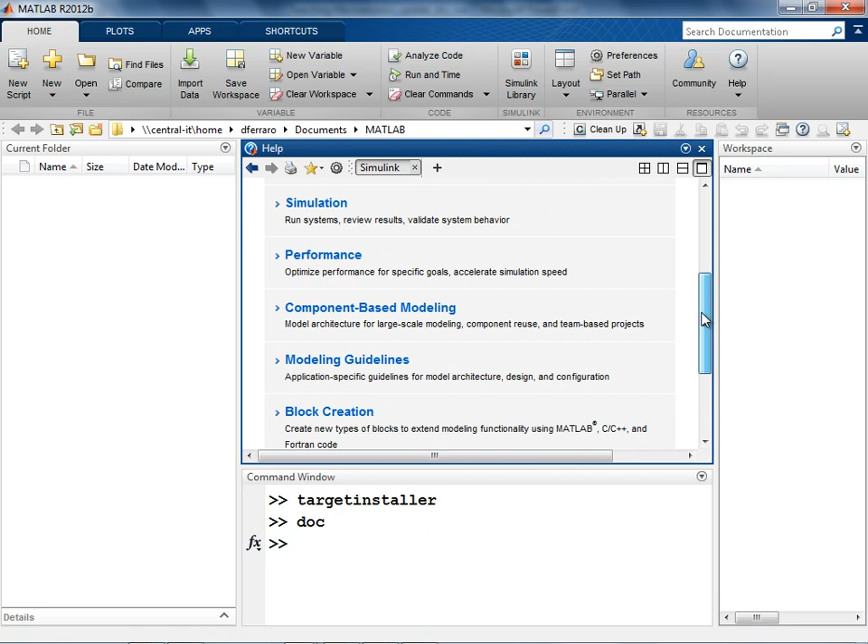This interface will install the required libraries as well as additional help, a set of demos and tutorials, and all the drivers and compilers you need to work with the hardware from Simulink. For example, you will get some additional documentation inside the Simulink documentation, target hardware. You also get access to a set of specific demos for the hardware: demos for Arduino, LEGO Mindstorms NXT, and BeagleBoard.

We will start now from a specific LEGO Mindstorms NXT demo called Roving Explorer. This is an example of a Simulink model developed to control the TriBot LEGO Mindstorms NXT robot. We are now seeing the model with the new Simulink Editor, available from release R2012b. Please remember that the features we are going to see today are available from release R2012a and included also in MATLAB and Simulink Student Version.

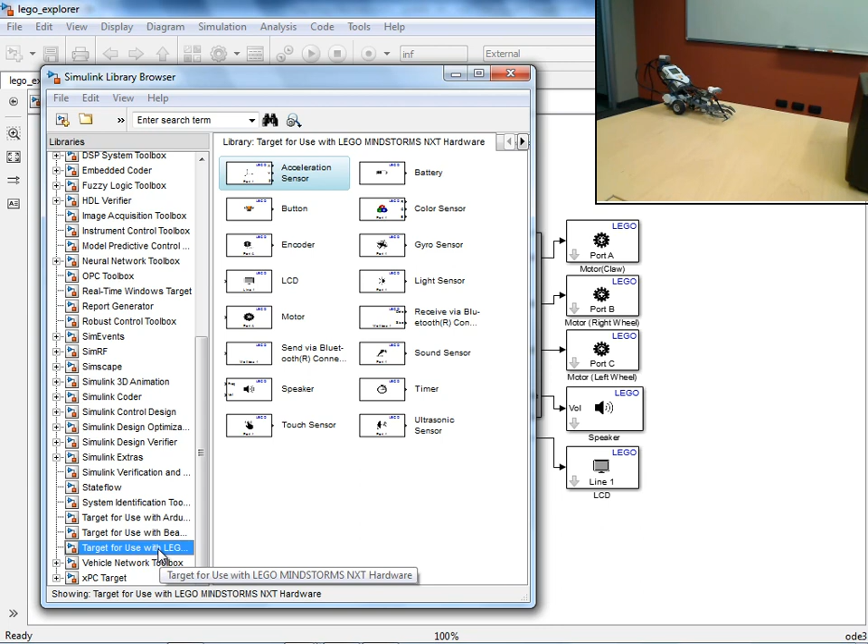In this model, we can read sensor inputs through a series of blocks that are included in the library Target for use with LEGO Mindstorms NXT that we have installed with the command targetinstaller. These blocks are reading the input from encoders, touch sensor, sound sensor, light sensor, and ultrasonic sensor. This information is then processed through a block diagram in Simulink inside this controller block. The output from the controller is then sent back to the robot using some actuator blocks like motors, speaker, and LCD.

As soon as the model is ready, I want to run it on the target hardware, our LEGO Mindstorms NXT robot. I can connect the robot to my PC using the USB cable. We may then run this model with two different configurations, an automatic and a manual approach. Let's start with the automatic approach. We execute the robot in an embedded configuration, removing all the communication with Simulink. All we need to do is go in Tools, Run on Target Hardware, and then click Run. After clicking on the Run button, the deployment process starts.

As soon as the download is completed, we can remove the USB cable and the robot is now programmed with a basic control algorithm for obstacle avoidance. As you can now see, the robot is now running independently from the PC.

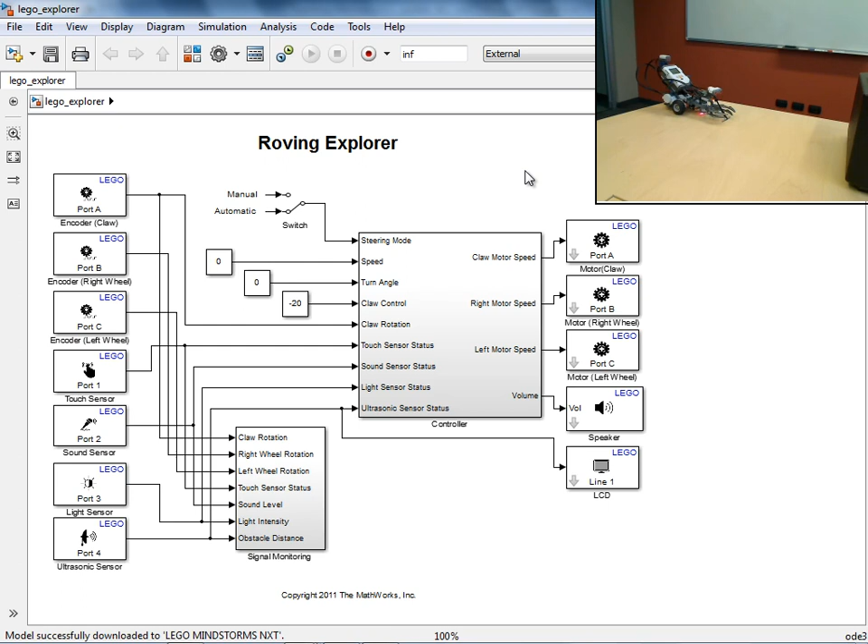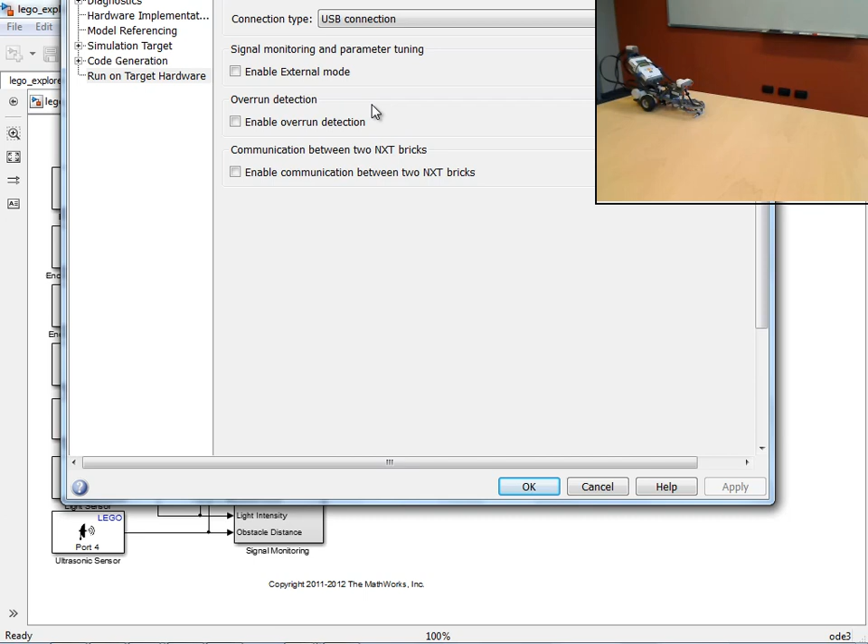A second option is to use external mode, allowing a Bluetooth communication between the PC and the robot. This mode allows the robot to exchange information with the PC during simulation. To enable external mode, we can set the switch to manual, we can check that the simulation mode is set to external, and then we can go to Tools, Run on Target Hardware, Options. In the options, we can flag Enable External Mode and press OK.

At this point, we can just, as we did before, click on Tools, Run on Target Hardware, and then Run to start the deployment process of the model on the robot. As soon as this process is completed, we can remove the cable. The communication is now offered by the Bluetooth connection. We are now ready to exchange some parameters in the model and see what happens on the robot.

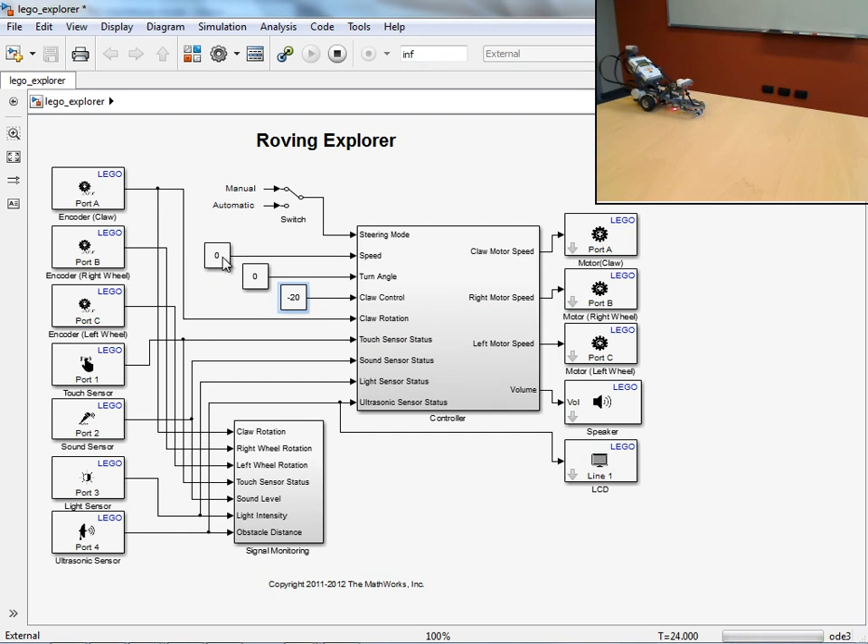For example, I can open and close the robot claw. So let's change a parameter in the constant block, and the claw opens, and then closes. Or I can change the speed and move the robot forward and eventually have it turn around.

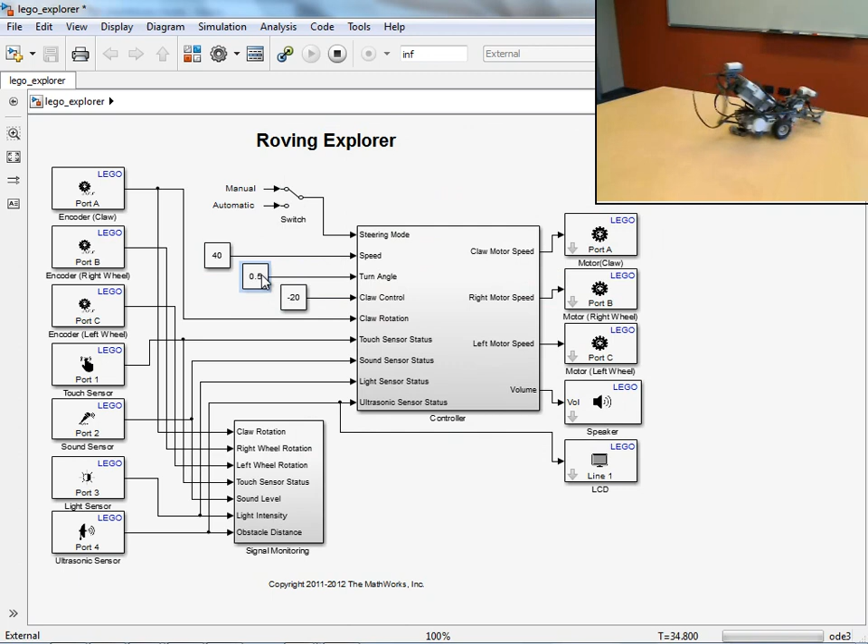Let's now step back on our three low-cost hardware platforms. We will see the typical application of these devices and the opportunities available for applying project-based learning methodology. Arduino can be a perfect choice to test your algorithms with hardware. You are able to develop communication between a PC and the board, or to design your application on the PC and then deploy it on the board for standalone execution. The board is a perfect solution for teaching algorithms, test and measurement, and control applications.

LEGO Mindstorms NXT is a popular choice for developing simple robotic systems. Thanks to the rich set of sensors and actuators, this hardware can be customized for many different applications. The design phase of an industrial robot can be applied in an educational context, offering the opportunity to experience system design and software development using the same techniques available in the industry. The last hardware we will discuss is BeagleBoard. This low-cost open-source Linux PC has multiple input-output connections suitable for signal and video processing applications.

Depending on the specific class you are teaching, you may consider which of these platforms can provide you the best hands-on experience for the students. To provide you guidance on this choice, we will review possible applications with Arduino, LEGO Mindstorms NXT, and BeagleBoard. The first platform we are going to introduce is Arduino.

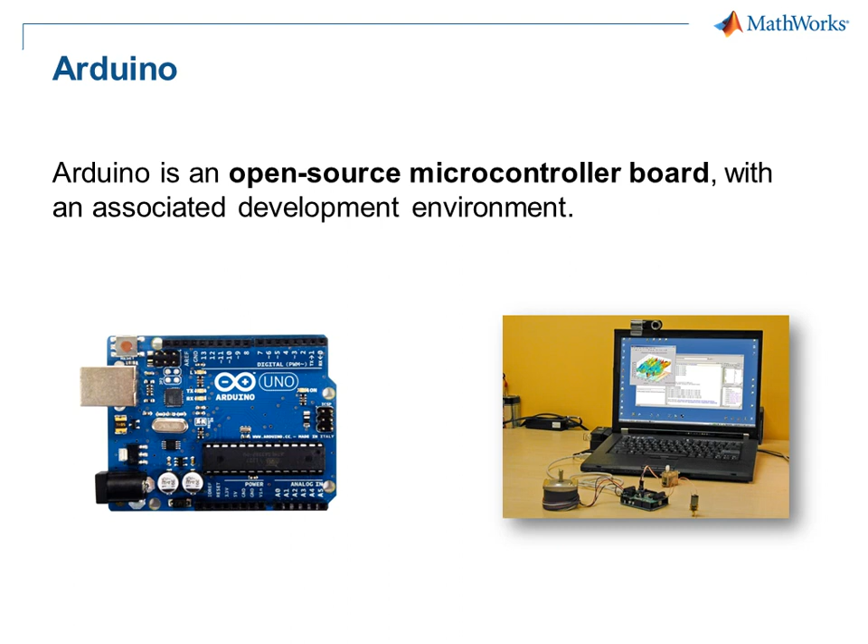If you want to use the board in a project, you need to connect it to sensors and actuators. Depending on the nature of your class, you may have different options. If you would like to have your students practice on electrical networks, you may like to use an external breadboard or a breadboard shield. This approach allows the student to design the electrical system first and then control input and output from MATLAB. If your shield does not require any specific library or instruction, it can be easily interfaced with MATLAB and Simulink. All you need to do is to map the relation between the Arduino pins and the board ones.

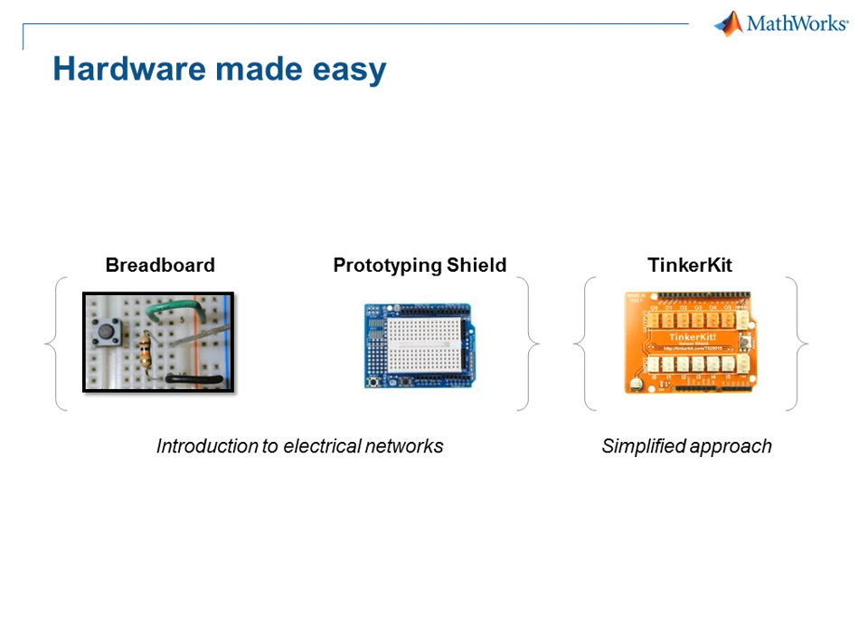If you would like to avoid introducing electrical networks and your focus is on the algorithm design, you may consider using a specific shield such as TinkerKit. The special shield comes with a set of ready-to-use sensors such as potentiometers and buttons, and actuators such as LEDs and mini servos that can be directly connected to custom pins. You do not need to build an electrical network. You can directly connect your components and start developing your MATLAB control algorithm.

Arduino is a very versatile platform. If you're looking for opportunities to test your algorithms on a real board or design mechatronics systems, you may surely find in Arduino an optimal solution. MATLAB enables the student to experience the interaction with the board from a basic input-output approach to the actual system design for an embedded processor. Due to the large popularity of this board, you may find many different applications on the internet that you may quickly introduce in your class.

Depending on the complexity that you want to introduce in your project, you may consider different approaches. A first interaction with the board can be achieved with the MATLAB support for Arduino package. Arduino is directly connected with your PC and an input-output communication is achieved through a serial connection. With this approach, you can easily acquire information from sensors, process in MATLAB using your own algorithms, and then send your output back to the board to control some actuators.

Thanks to this tethered approach, you may have your students practice on basic algorithms or more advanced applications, for example control, test and measurement, signal processing, everything in connection with real hardware. The next step is to move from the algorithm to the realization of an embedded application to be deployed on the board. We want to program Arduino to execute specific tasks without being connected to a PC. The board becomes an independent system that can be installed into real-world applications such as robots, cars, airplanes control units.

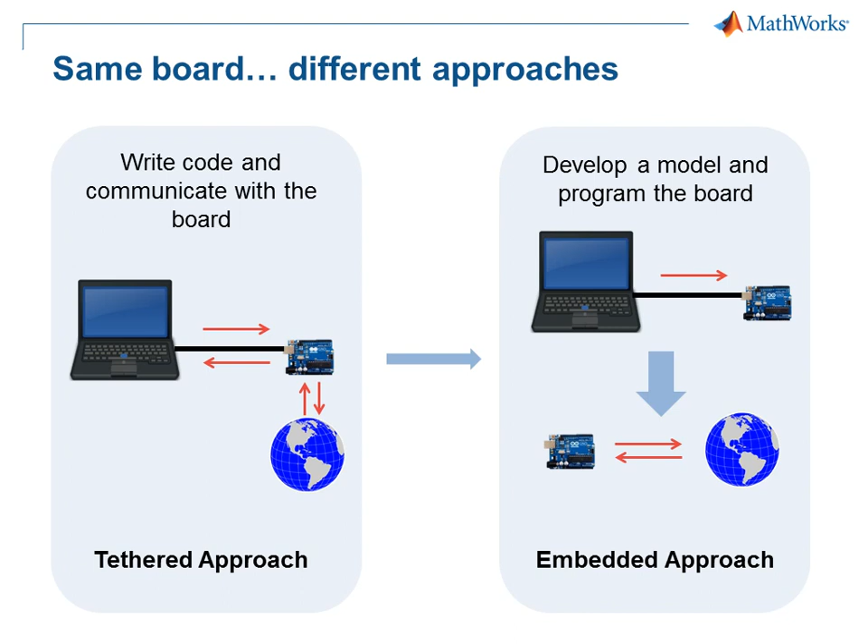This is what we call embedded approach and can be implemented through Simulink support for Arduino. The system can be modeled and simulated in Simulink environment through block diagrams. The model is then converted into an executable to be deployed on the board. We will see how this workflow allows the students to experience an engineering design process focusing only on the design tasks without low-level hardware issues. Let's focus on the tethered approach first.

As we have just introduced, the tethered approach is based on a direct communication between the Arduino and MATLAB. The USB cable connected to the PC allows us to transmit data back and forth with the board using serial communication. Through basic algorithms, you are then able to read and write information with an input-output approach. To start using this functionality in MATLAB, you may download the MATLAB support package for Arduino that is available on the Hardware Support for Project-Based Learning page we have seen before.

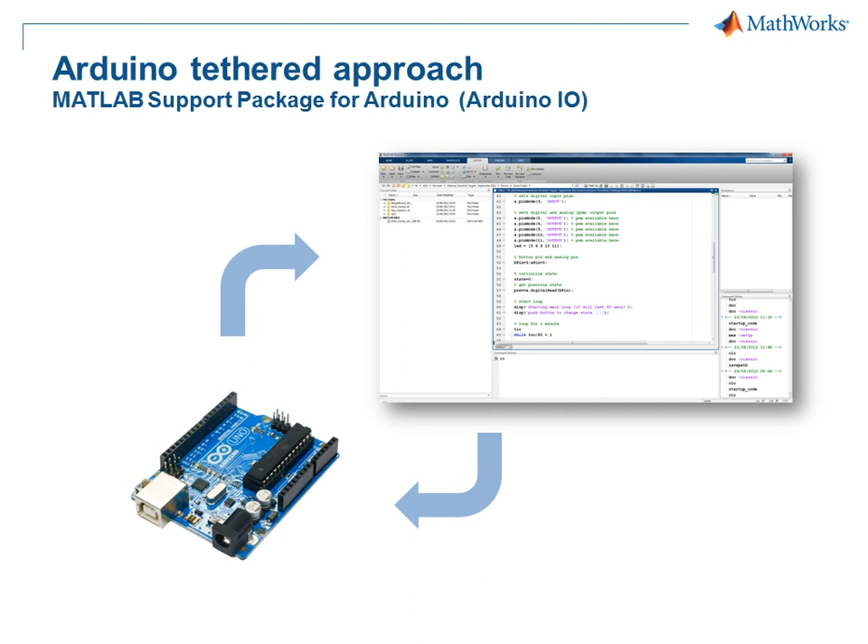This package contains a server application to deploy on the board that will take care of handling the communication with MATLAB and a list of simple commands to be used to control the communication. The abstraction of computer science is then transferred into an interaction with a real platform. Let's now see two simple applications of MATLAB support package for Arduino. This example is called Arduino Blink Challenge and is a simple programming task with Arduino.

First of all, let's have a look at the hardware. We have an Arduino Uno board with on top a TinkerKit shield. The TinkerKit shield offers a series of input ports as well as output ports. Connected to the input port, we have a linear potentiometer. As an additional input connected to an output port, we have a button. The output port can be interpreted as a digital input port. All the other outputs are actually LEDs of different colors.

Our challenge is to control the way that the LEDs blink by using the button and the potentiometer. We consider 4 different modes. In the first mode, all the LEDs should be off. In the second mode, all the LEDs should be on. In the third mode, all the LEDs should blink simultaneously with variable frequency regulated by the potentiometer. In the fourth mode, the LEDs should blink sequentially, like a wave, with variable speed regulated again by the potentiometer. The button should allow us to move from one mode to the other.

Using the tethered approach, we can use a MATLAB script to acquire the input from the button and the potentiometer and control the state of the LEDs. Let's have a look at the code. With the command Arduino, we are able to establish the communication from the PC to the board. In the next section, we are initializing our pins. We are choosing if a pin on the board should be interpreted as an input or an output.

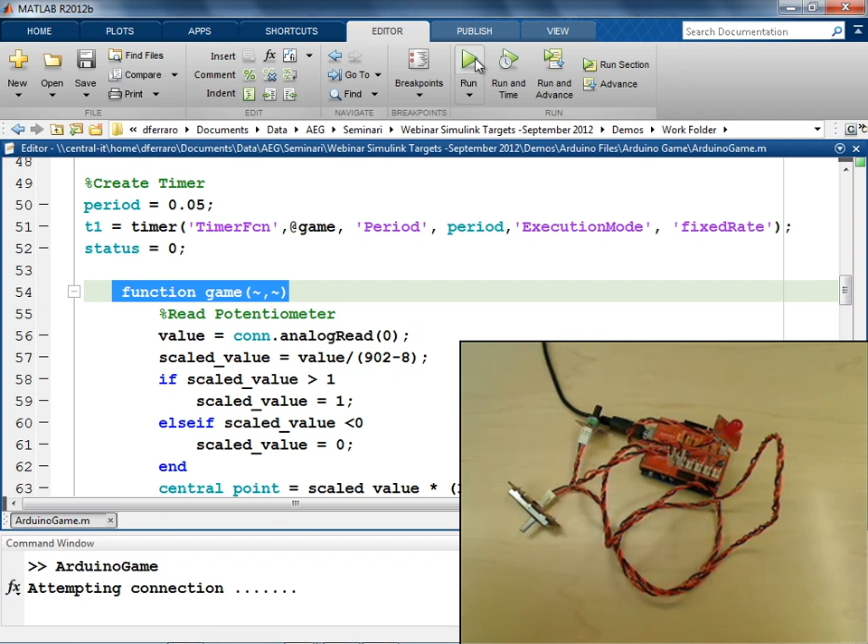As we have seen before, we are now opening our connection from the PC to the board. As soon as the connection is created, we can open the actual graphical user interface. Clicking on the Start button, I can start playing and use my linear potentiometer to control the bar. I can then use the rotary potentiometer to control the ball speed, making it slower or faster. I can then close my simulation and my interface.

What's particularly interesting is that we are able to develop a simple and fun application communicating with a hardware platform in a short time, without the complexity of interfacing the PC with the external hardware. The applications I've just introduced were based on a direct communication between Arduino and MATLAB. We refer to this configuration as the tethered approach.

If you would like to increase the complexity and realize an application written on Arduino that can run independently from MATLAB, you may move to the embedded approach. Run on Target Hardware, the new feature we have previously introduced in our example, enables you to develop a model of your algorithm in Simulink and deploy it to the Arduino board.

You can then remove the connection and power the board with an external source. The board will now process inputs and outputs as described in your model without any connection with an external PC. This approach allows you to easily realize an embedded application through the same process used in the industry. Let's have a look at an example.

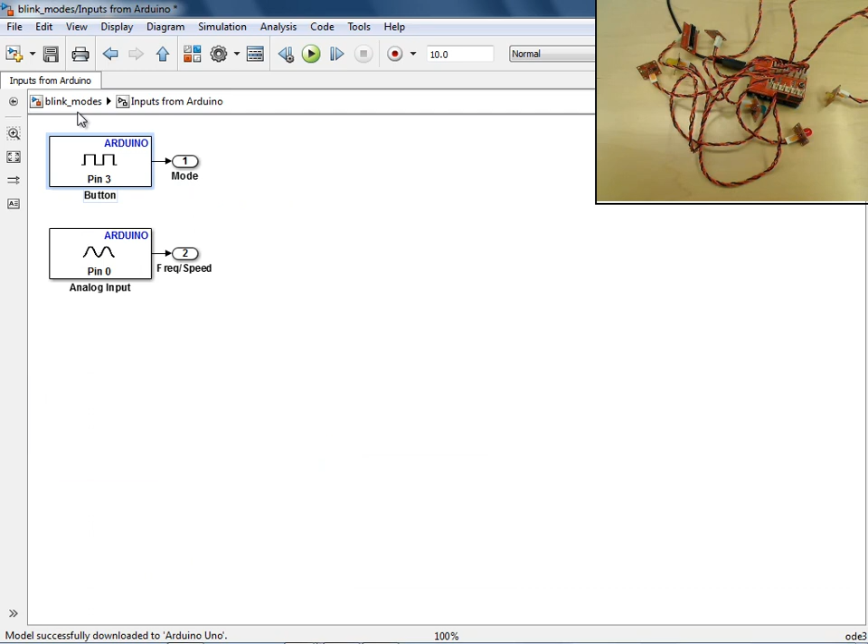The Simulink model is implementing the Blink challenge that we have previously seen with the MATLAB code approach. If you are not familiar with Simulink, Simulink is a graphical modeling tool that allows you to simulate, design, and implement dynamic systems. Simulink allows us to create our custom subsystems for inputs, for data processing, and for outputs.

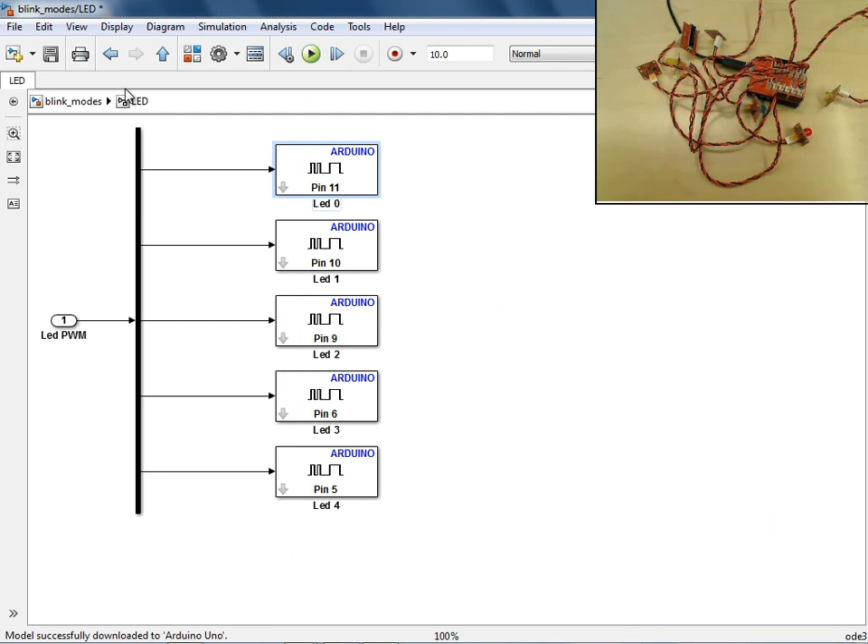You may notice these special blocks. These are the blocks that house the communication with the board, and are taken from the Target for Use with Arduino Hardware library that we have previously installed using the target installer command. We may have different approaches to solve our problem. It's up to the student to play with the model and identify an appropriate and efficient solution.

In this case, you may notice the use of conditional subsystems like triggered or enabled subsystems that are controlled by the use of the button. As we have seen earlier, as soon as we have defined the interfaces and the algorithm, we are able to deploy it on our board. I click on Tools, Run on Target Hardware, and then Run.

The model will be analyzed and an executable is automatically generated. The graphical diagram is then automatically converted into an application that is deployed to the board. The process is now complete. We may remove the USB cable. In this case, we will leave the cable connected to power our board, but you can remove the cable and connect an external power source.

We may then test our board, so state 1, the initial state, all the LEDs are off. If I click, all the LEDs go on. Another click and all the LEDs blink simultaneously with variable frequency regulated by the potentiometer. Last click, all the LEDs blink like a wave with variable speed, again regulated by the potentiometer. If I click again, all the LEDs go off.

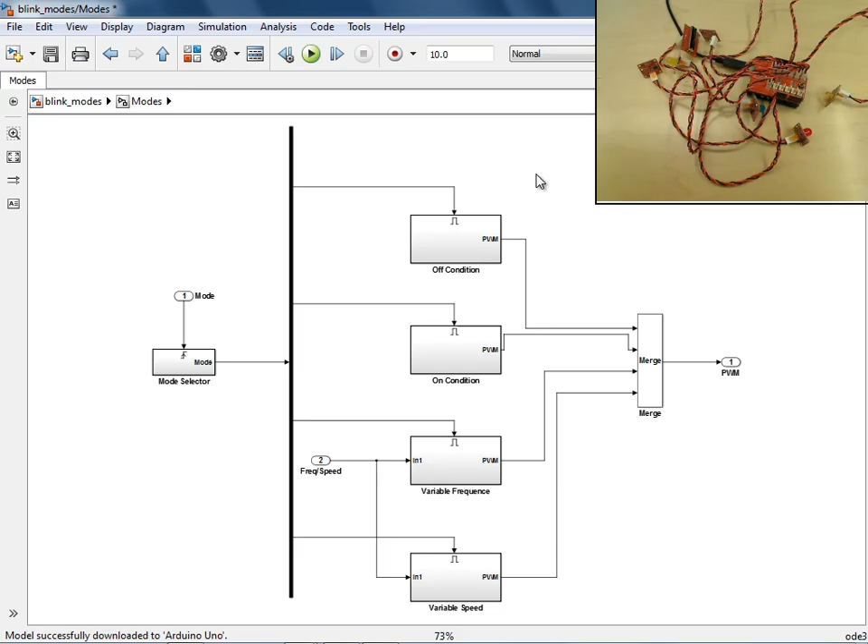Let me summarize the benefits of using MATLAB and Simulink with Arduino. We have two different approaches, tethered and embedded, that allow you to control the project complexity as well as the goals. If your project is focused on programming, surely MATLAB and this language can be an appropriate choice. As soon as your goal is to model a more complex system, you may consider moving to Simulink and to the application deployment approach offered by the Run on Target Hardware feature.

Both MATLAB and Simulink offer a suite of algorithms and blocks developed for specific applications that allow the student to focus on the system design rather than on specific algorithms or functionalities. Let's move to our second hardware platform introduced today, LEGO Mindstorms NXT.

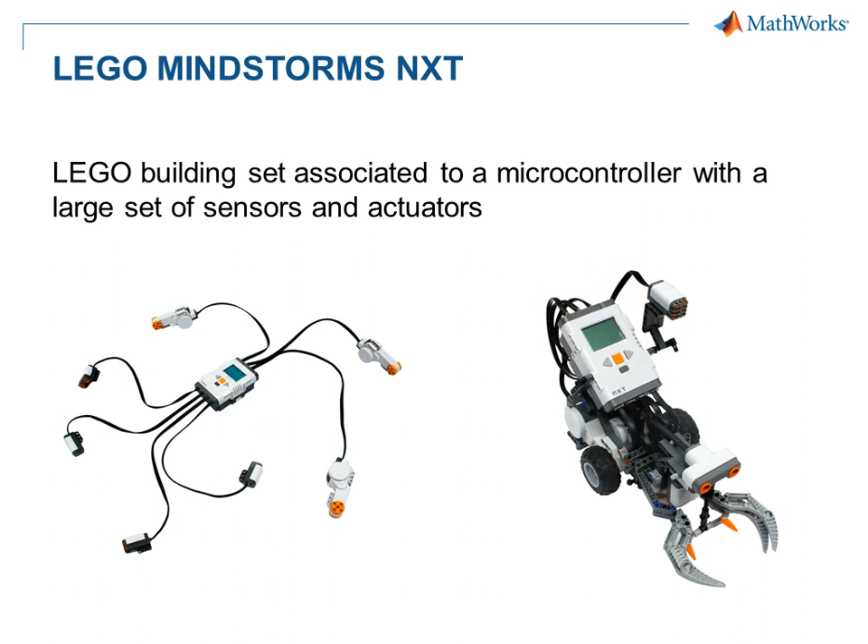LEGO produces a complete solution for the development of simple robots. A LEGO Mindstorms NXT set usually contains a control brick based on an ARM processor, some servo motors, a set of different sensors, and many construction elements that allow the student to creatively build new robots. These platforms have a really high flexibility being based on the LEGO construction system, allowing you to develop a project targeted for various applications. So, why may you consider using LEGO in your class?

In a project-based environment, the student can experiment a full design cycle from the initial design to the testing. LEGO allows the students to build a robot on their own. As soon as the design is complete, the robot logic can be designed and tested through experiments on the hardware. Depending on your goals and students' experience, you may consider different approaches to this hardware. You may start from a simple interaction with the robot suitable for high school students, or develop a full development process for a mechatronics course at university level.

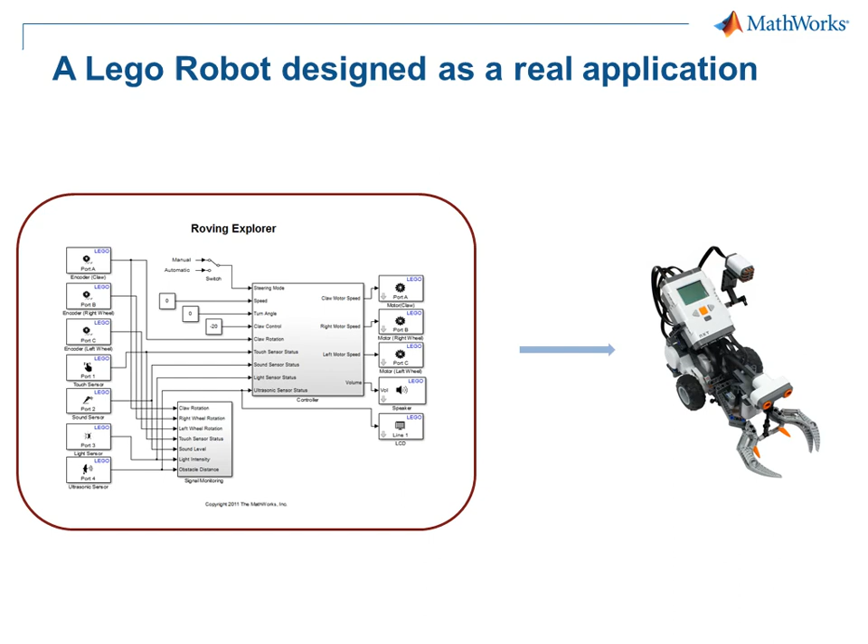In the first example, we have seen the process that allows us to deploy a Simulink model on the LEGO robot. What we want to do now is to establish a workflow based on simulation, design, and implementation as adopted in the industry. We will call this workflow Model-Based Design. To develop an embedded system, we may need a full process that allows us to simulate the robot and design the controller. Model-Based Design is the detailed process used in industry that goes from the research phase to the implementation through different phases including simulation, code generation, verification and validation.

For teaching purposes, here you can see a reduced version of this process suitable for applications developed with Run on Target Hardware. We start from the model. We simplify our complex system into a mathematical form that allows us to analyze the system numerically. The equation can be translated into a Simulink block diagram for simulation. In this environment, we are able to predict the behavior of our system without testing on the hardware. In Simulink, you can design new components for the system, such as a controller.

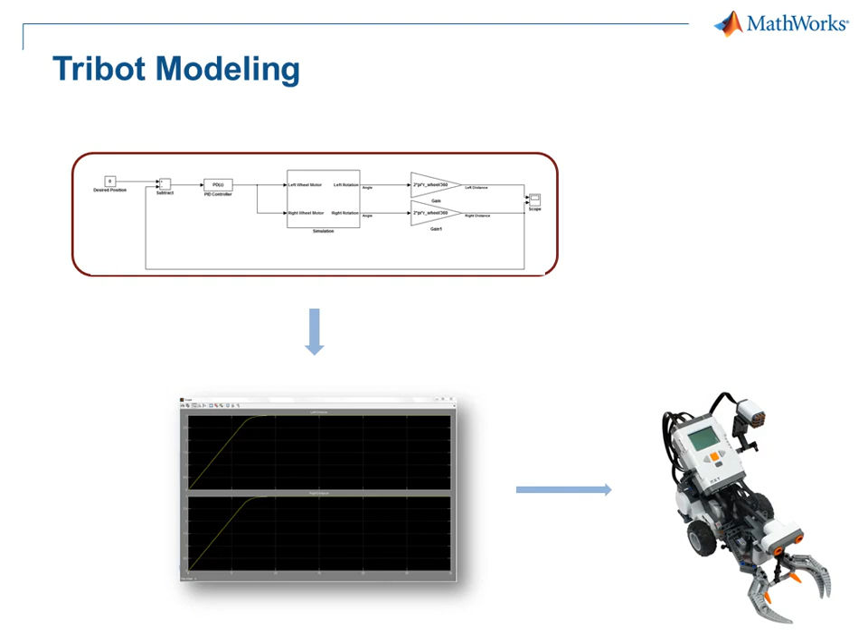As soon as you have completed the simulation phase, you may be interested in moving your algorithm to the hardware. An application is automatically generated in Simulink and then deployed on the hardware. You can then test the behavior on the actual hardware. Let's see this design process on a simple control task for the Tribot robot. This is a simplified model of the robot to simulate linear motion.

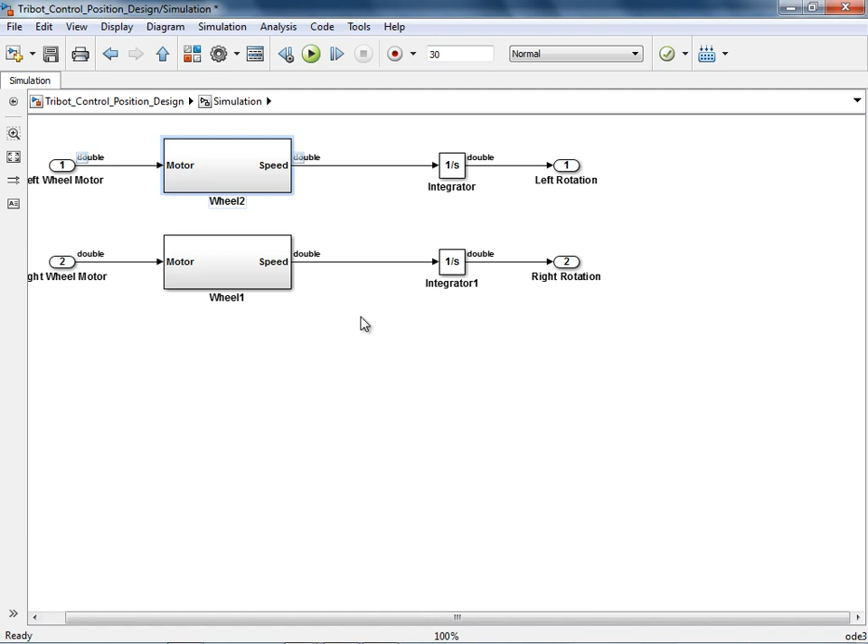In the simulation subsystem, you can see the modeling of the motors that have been constructed through a data acquisition process with the real hardware. You may also consider building more advanced models starting from the real physical configuration of the motor. To allow the robot to reach a certain distance, I've added a feedback loop with a PD controller. The controller design can be performed in many ways. In my case, I've used the Simulink Control Design feature called auto-tuning.

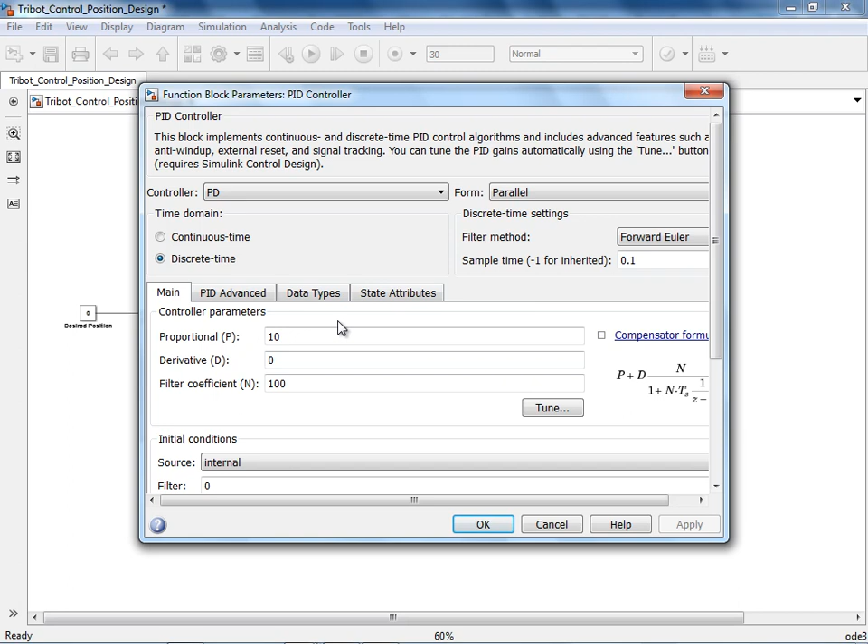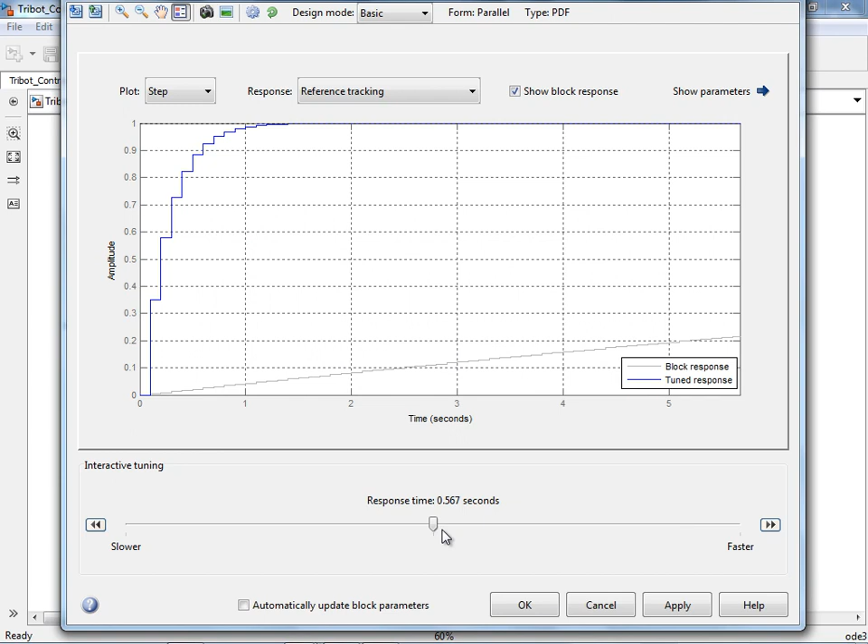By clicking the Tune button, the controller will be automatically tuned and designed. I can then modify the response time, or using the extended mode, I'm able to set a specific bandwidth and a specific phase margin. As soon as I'm OK with the design, I can click OK. And I have all the information I need to move this model to the actual hardware.

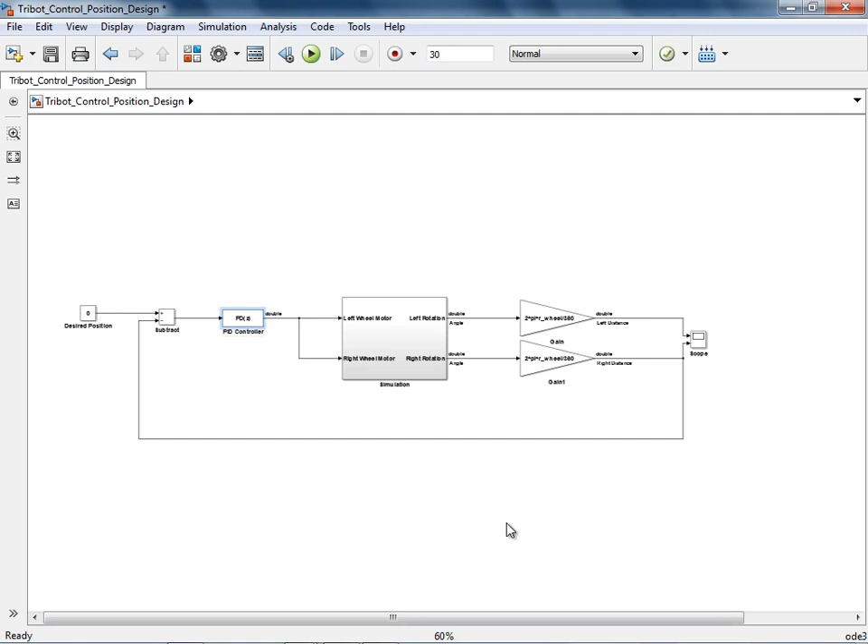In this model, the main block has been substituted by the encoder and motor blocks taken from the LEGO Mindstorms NXT hardware library that we have previously installed. The loop is now a control loop running directly on the actual robot processor, and this allows the robot to reach the desired position. I will now simulate with external mode, clicking on Tools, Run on Target Hardware, and then Run. Since the current position will differ from the desired one, the controller will generate a request to the motors and the robot will start moving to the goal.

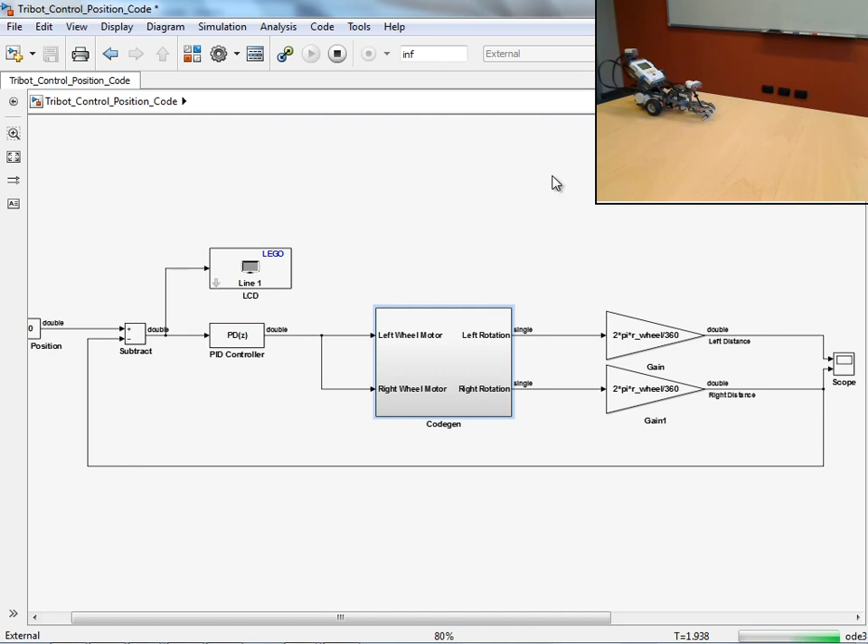As soon as the download is completed, I can remove the USB cable. We are now communicating using Bluetooth connection, and I can change the desired position from 0 to 0.3, it's in meters, so 30 centimeters, and the robot moves 30 centimeters, and I can move the robot back, so setting back to 0.

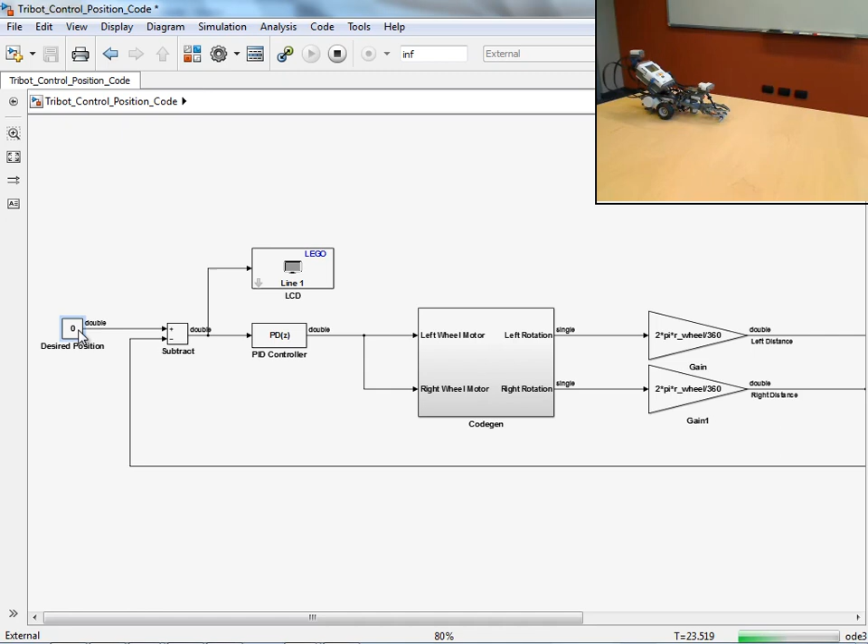With this approach, you may start the development of more complex tasks and configurations. Let me summarize the benefits of using MATLAB and Simulink with LEGO Mindstorms NXT. The LEGO kit offers you the opportunity to develop a robotic system from the concept to the actual implementation. By using Simulink, you can introduce in your project a real design flow that's typical in industry.

The run-on-target hardware feature enables us to simplify the deployment process, making it possible to program the LEGO brick directly from Simulink models. The additional block set and tools allow you to simplify the design of algorithms and controllers for specific tasks. The last hardware I will introduce today is BeagleBoard.

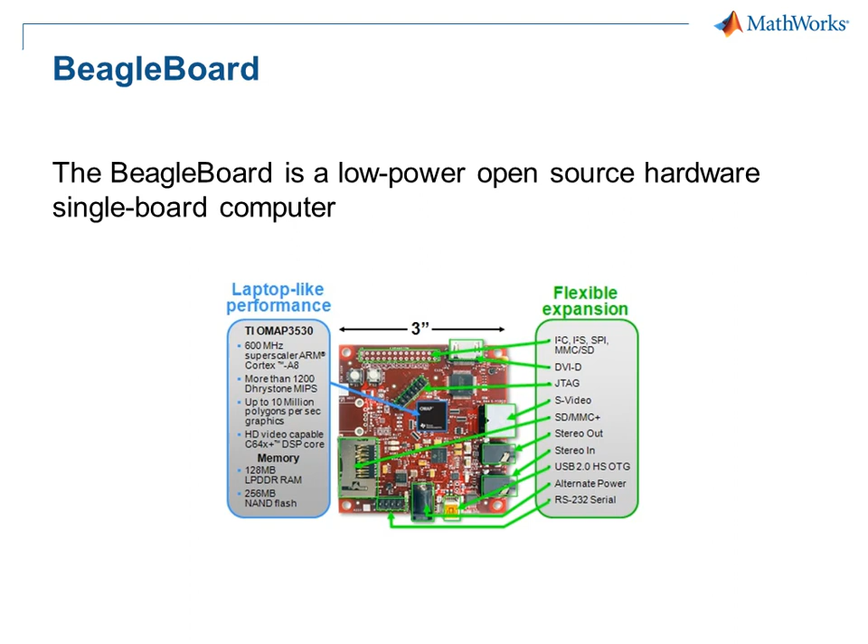BeagleBoard is a low-power open-source board with laptop-like performances with a TI ARM Cortex-A8 processor. The board offers a large set of connections, including USB and video plugs. Thanks to this high number of possible connections, it is commonly used for signal and video processing applications. So, why you may consider using BeagleBoard in your class? As we have just introduced, this board enables the student to easily practice with signal and video processing applications.

As an example, a standard webcam can be directly connected to the board that will acquire the data, perform image processing algorithms, and then output the processed signal back to an external monitor. This goal can be achieved through executable applications in the same way as discussed for Arduino and LEGO Mindstorms NXT. Let me show you an example. Let's analyze the problem configuration.

Our BeagleBoard is connected to a PC through Ethernet. This connection allows us to deploy the code and eventually control the execution through external mode. As we have seen with the LEGO robots, the external mode allows us to have a communication between the PC and the hardware during the simulation. This communication can be used to tune parameters or to log the data.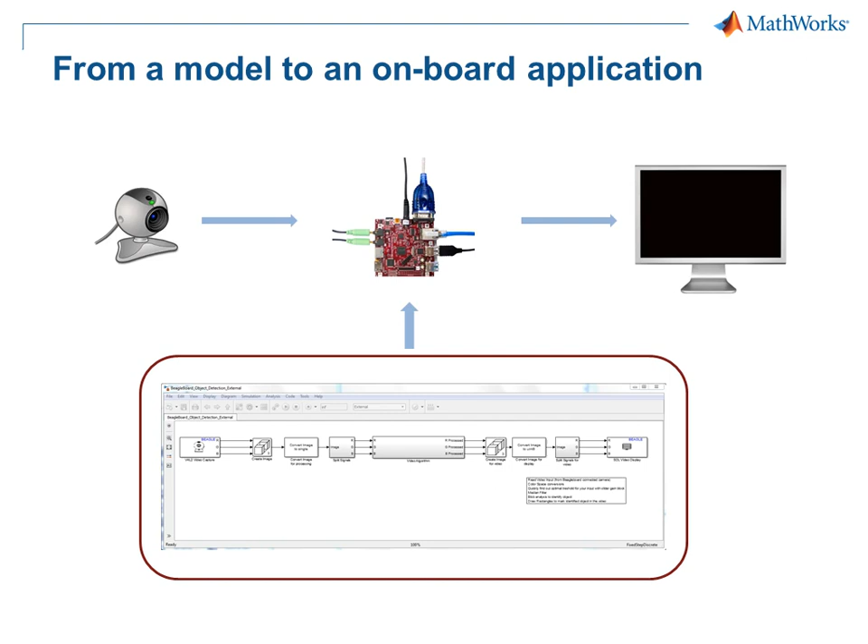The BeagleBoard is then connected to a webcam to acquire images and to a monitor. If we do not have an external monitor, we can send the image back to our PC using the external mode. We are going to introduce a simple object detection algorithm. Our goal is to identify one or more red objects in the image. The BeagleBoard acquires an image from the webcam.

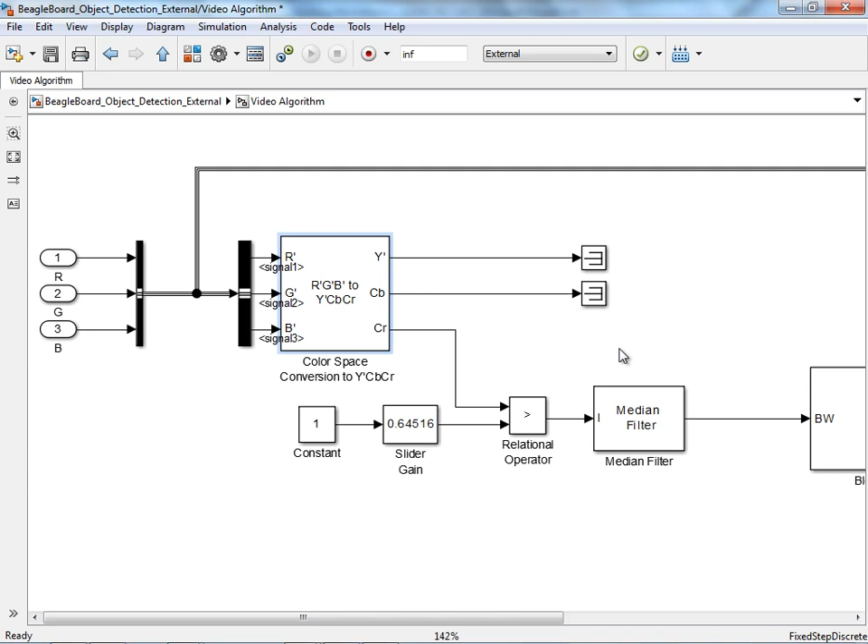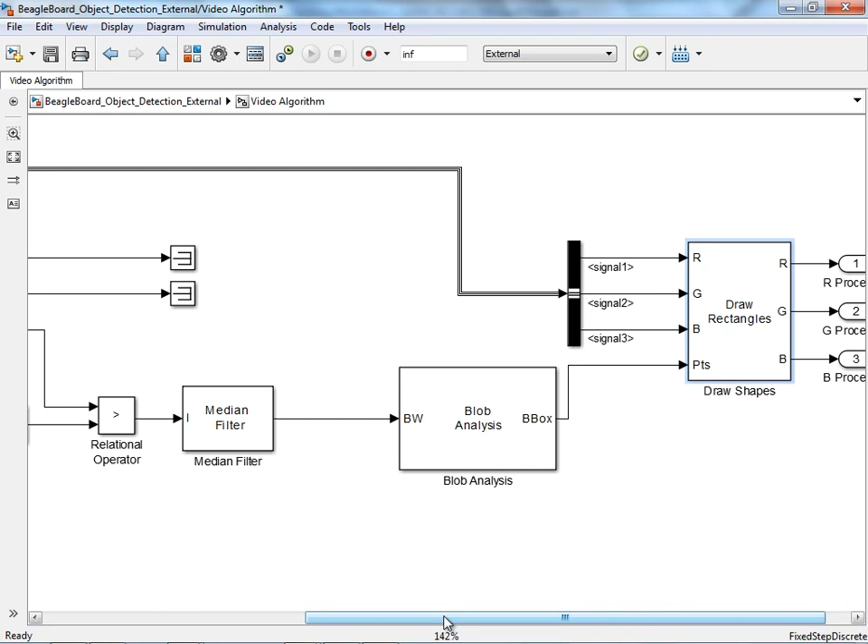The image is then processed through a series of image processing blocks. These blocks are part of the Computer Vision System Toolbox, a tool specifically developed for video processing applications. Essentially, the algorithm will extract the red chroma component of the image. A blob analysis is then performed to identify the shape of the object, and a rectangle is created around it. We are able to tune a filter depending on the light conditions.

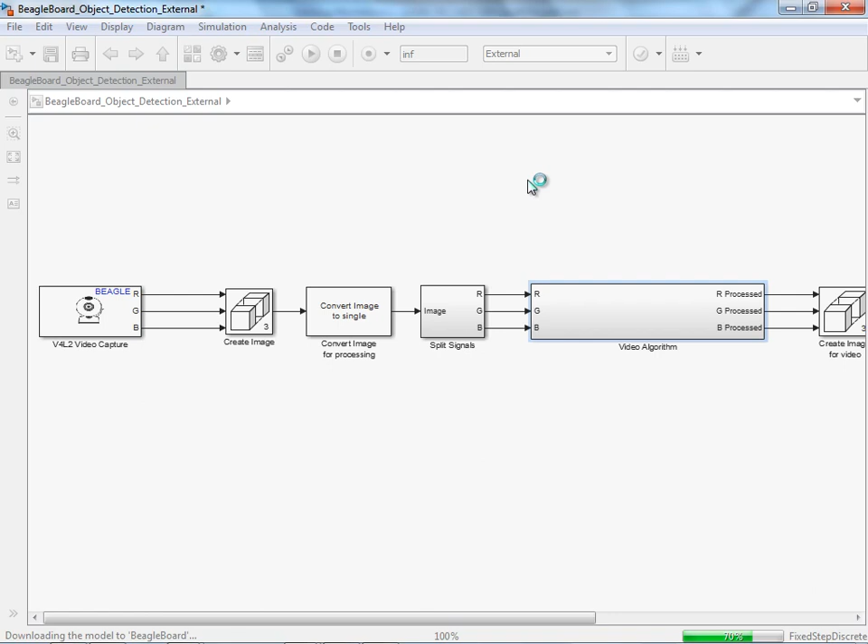As we did before, the deployment of this model on the board is very simple. We just need to go on Tools, Run on Target Hardware, and then click Run. This will start the deployment process of the model to the board. As soon as the deployment process is over, we are now communicating using external mode with the board. In this way, we are able to get back on our screen the image processed from the board.

As you can see, we are identifying some red objects, like this one, or the small icon on top of the box. The other objects, like this pen, are not identified. We can also see the actual board, so I can show you the connections. We have a power plug connected to power up our board. We have an Ethernet connection. This enables our external mode.

If we use an embedded approach, we can then remove the connection. And we have our webcam, the one that's recording this image. The algorithm identifies a red object dynamically with the video, so I can move this cap. And as soon as the image is part of my screen, the red object will be identified.

Let me summarize again the benefits of using Simulink with BeagleBoard. As discussed with previous hardware platforms, the one-click executable generation approach allows your students to interact with the hardware, avoiding working with low-level functions and interfaces. Simulink is also offering a wide set of functionalities for image and video processing applications that makes it easy to develop advanced algorithms typical of the industrial world.